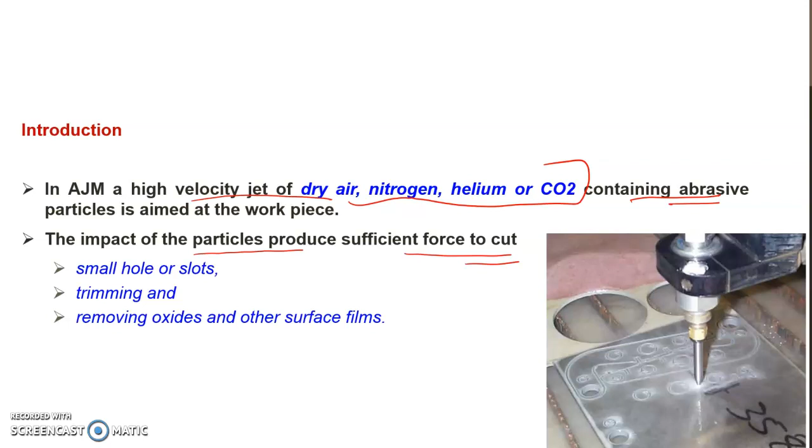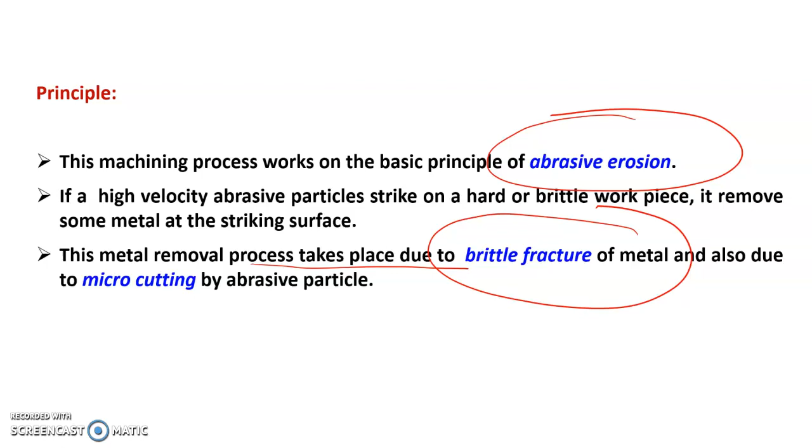The AJM process works on the basic principle of abrasive erosion, and the metal removal takes place due to brittle fracture of materials and also due to micro cutting by the abrasive particles. The setup is shown in this diagram.

High pressure gas is supplied through filters and dryers. The filter is used to remove the dust and other suspended particles from the gas, and a dryer is used for removing the moisture content. The dry clean gas is then admitted to the mixing chamber where the abrasive feeder feeds abrasive into it. The abrasive size is about 50 microns.

Then this high pressure gas plus abrasive expands through a nozzle where the potential energy is converted into kinetic energy. So we get a high velocity gas plus abrasive mixture through the nozzle, and the velocity is around 200 meters per second.

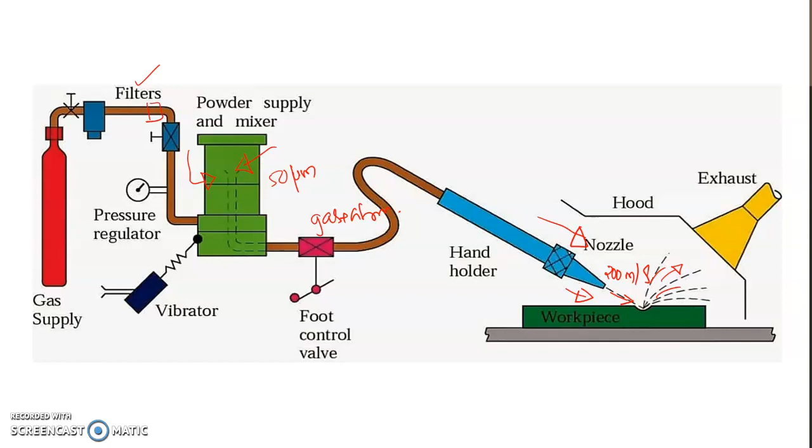Now these high velocity abrasive particles are made to impinge on the work surface, and the material removal happens with micro cutting and brittle fracture mechanisms.

The performance of the AJM process depends on four process parameters as shown in this fishbone diagram. The parameters are work material, nozzle, abrasive, and gas. In work material, we consider its various types. In nozzle, the material, its geometry, feed rate, and standoff distance, that is the distance between the nozzle and the workpiece. These are the factors.

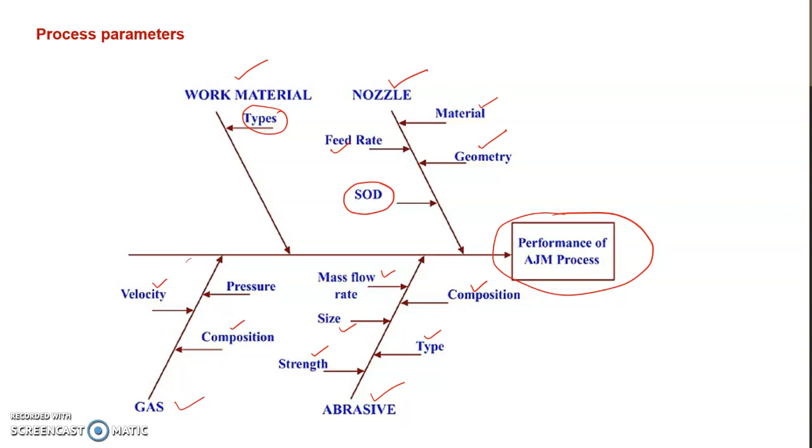Then in abrasive, we consider its strength, type, size, mass flow rate, composition, etc. And finally, in gas, we consider the composition, velocity, and pressure. When the gas jet in an AJM process is replaced with a water jet, it is known as abrasive water jet machining or AWJM.

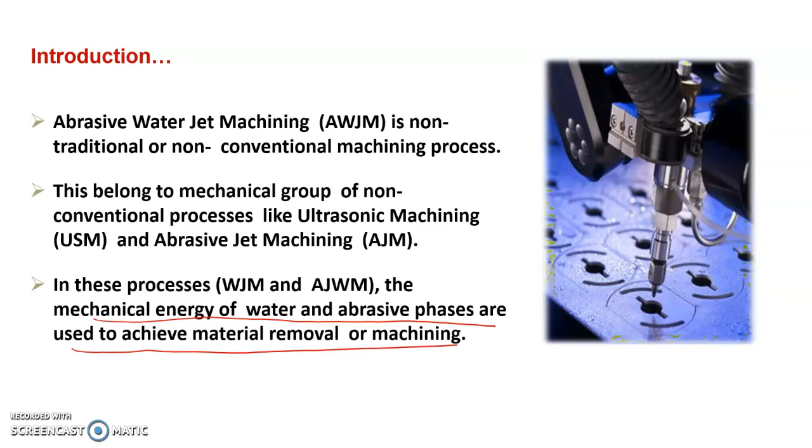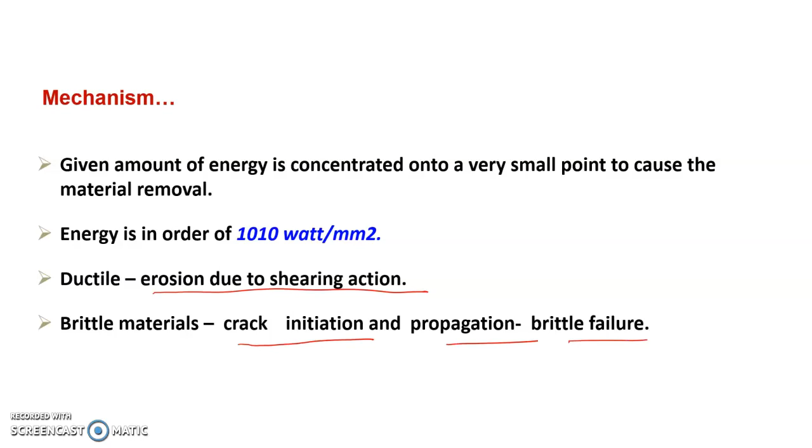The main parts include an intensifier pump which pressurizes the water to a high pressure ranging from 2000 to 4000 bars, and this high pressure water is stored in an accumulator in order to reduce the pulsating action of the water pumping. Then this pressurized water is admitted to a nozzle through an orifice.

The nozzle has a mixing chamber where it is mixed with the abrasive particles, and when it is passed through the nozzle, its potential energy is converted into kinetic energy, and the velocity of the jet will be around 800 to 1000 meters per second, that is around 2.5 Mach. This high velocity abrasive plus water mixture is capable of cutting almost all materials.

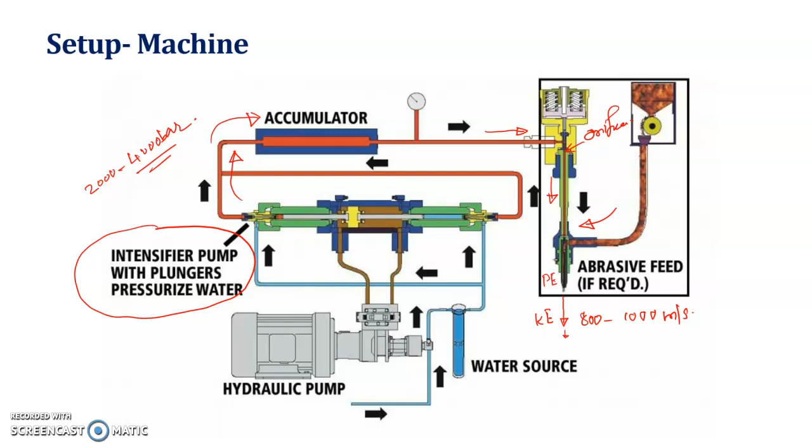The nozzle contains two parts. One is the mixing chamber where the abrasive particles get mixed with the water jet, and the second part is known as the focusing tube. The focusing tube is made of a hard material, tungsten carbide, since it is subjected to high wear rates.

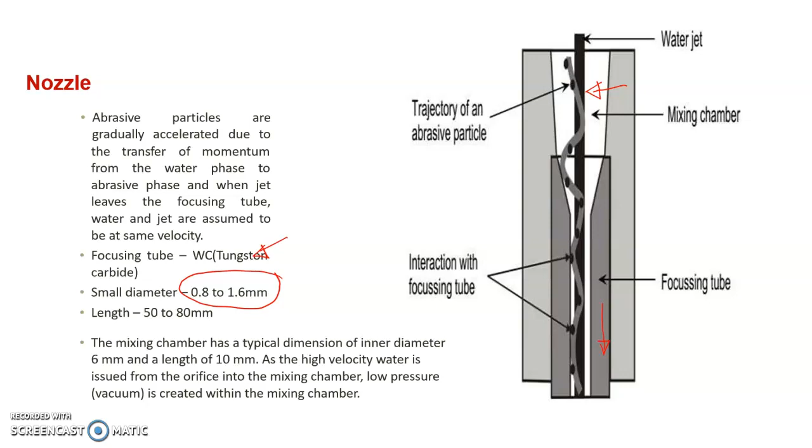The focusing tube diameter is between 0.8 to 1.6 mm, and the length is around 50 to 80 mm. The sketch shows the sectional view of the nozzle in which the orifice, the mixing chamber, focusing tube, and the nozzle cover are shown.

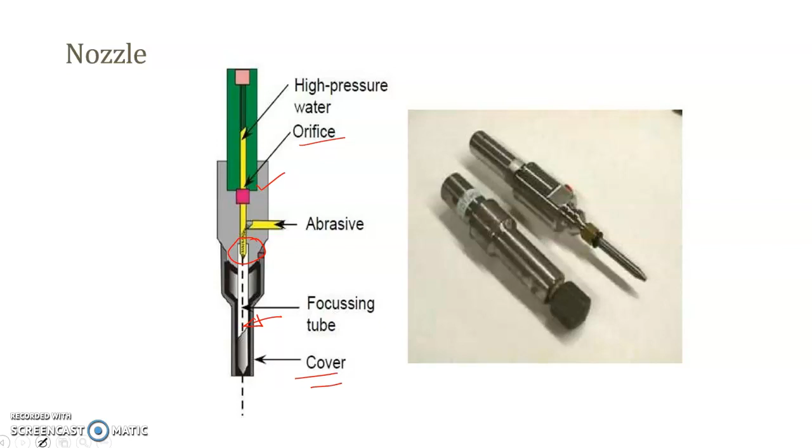And finally, it has a catcher which is used to absorb the residual energy of the water jet and dissipate it. That has to be contained because after machining the abrasive particles have high energy, otherwise they will damage the machine parts or the operators. There are three kinds of catchers used.

One is the water basin type in which water is used to absorb the abrasive jet. The second type uses steel, tungsten carbide or ceramic balls. And the third one uses catcher plates made of titanium diboride. When the jet hits these plates, its velocity is brought to zero.

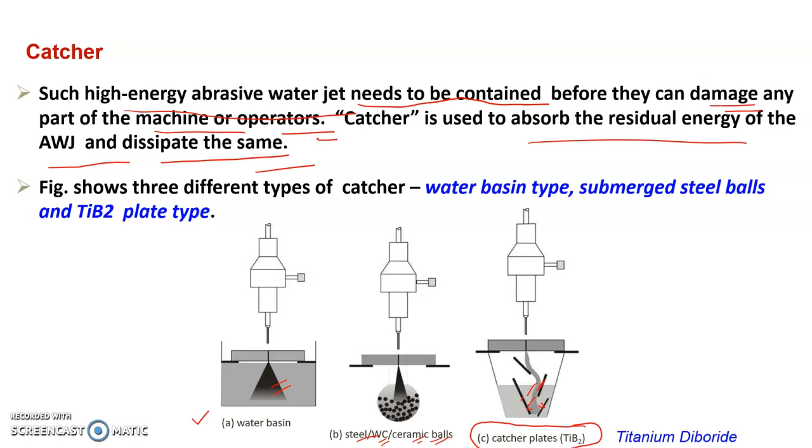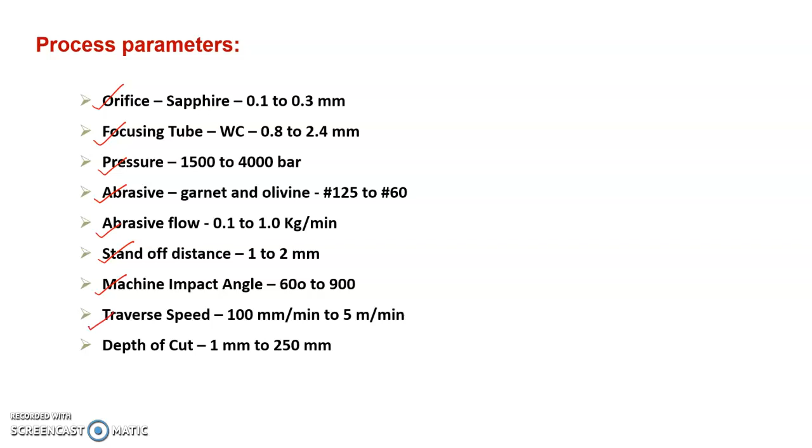The process parameters of AWJM include the orifice size, the focusing tube size, the pressure used, the abrasives used, abrasive flow rate, standoff distance (SOD), impact angle, traverse speed, that is the feed rate, depth of cut, etc. Thanks for watching.